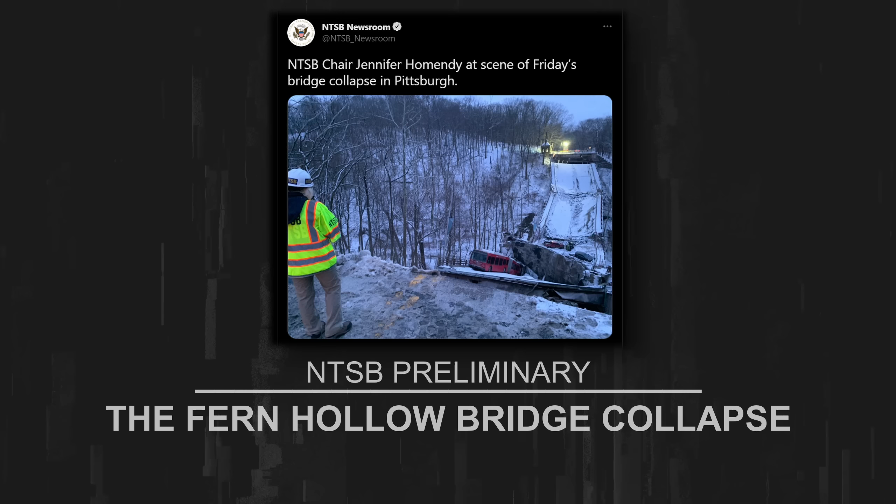As of the making of this video, the NTSB investigation is still ongoing, so anything related to the collapse itself will be sourced largely from their findings via the publicly available report, and thus will include little to no speculation.

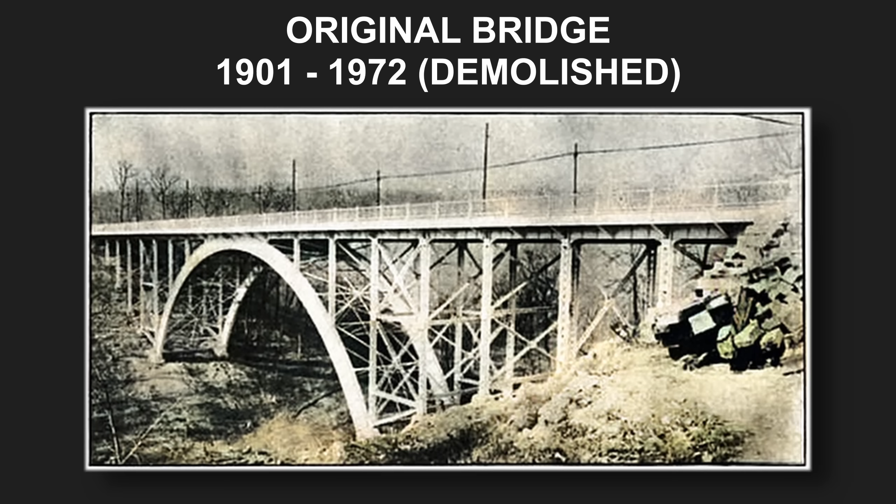In my usual fashion, I've done a bit of my own homework in setting the stage pre-collapse, but the truly deep dive, even into the bridge's history, will have to wait until the full-length episode.

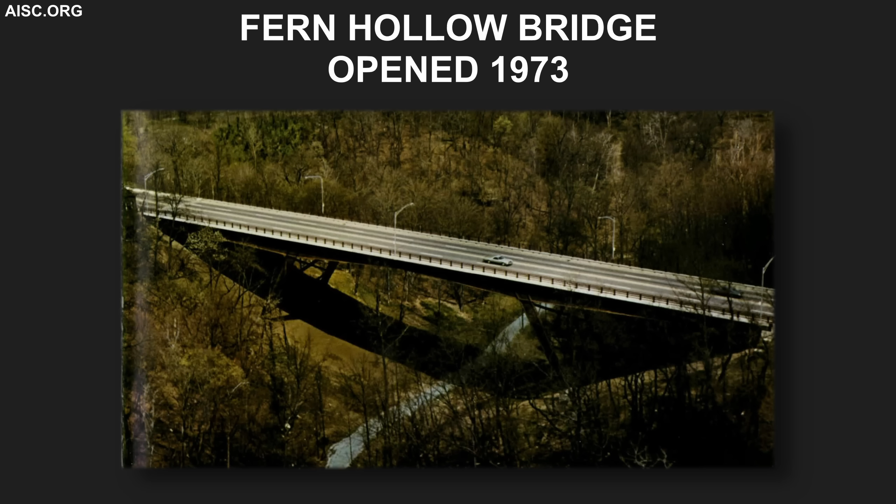Roughly 50 years old and fracture critical, the Fern Hollow Bridge connected Squirrel Hill and Oakland neighborhoods, carrying frequent passenger vehicle and bus traffic, with Port Authority public bus routes passing through dozens of times daily. This was also a popular route to reach downtown Pittsburgh.

At 4 lanes wide with a sidewalk on either side, the bridge passed through Frick Park directly over Tranquil Trail, a forested bike and footpath in the ravine, and nearby to a dog park and children's playground.

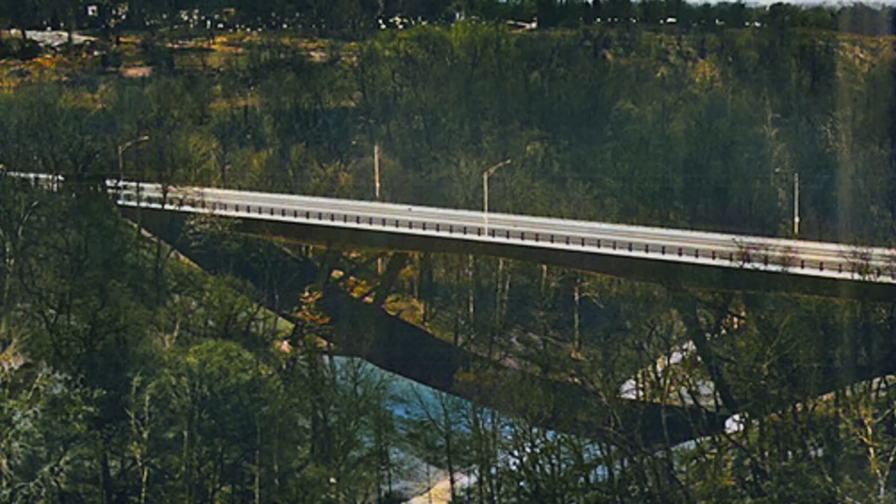Carrying Forbes Avenue traffic across the northeast side of Frick Park at what appeared to be a speed limit of 35 miles per hour, the bridge was 447 feet long, 60 feet wide, and about 100 feet high above the lowest point in the ravine. At 3 spans total, weathering steel forming a continuous K-frame comprised the bridge's structure.

It was relatively short as it only needed to cross about a third the width of the park, the remainder of Forbes Ave within Frick Park at relative street level.

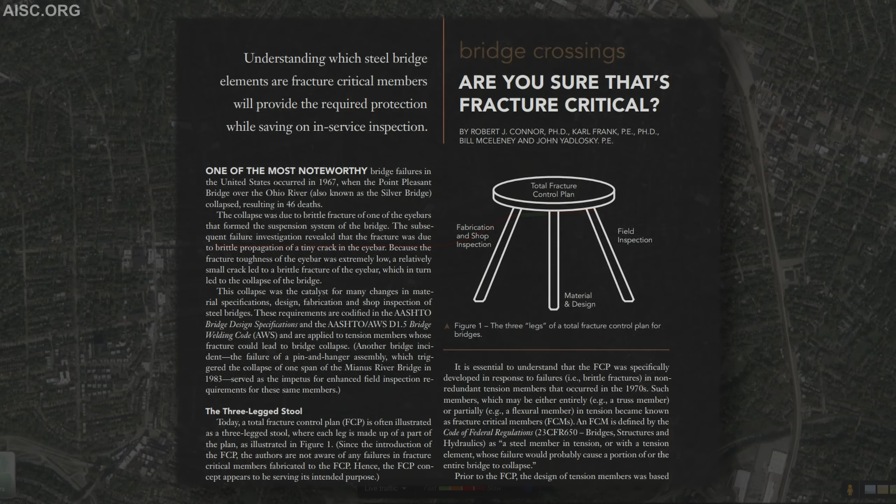Like a 3-legged stool, fracture-critical bridges are those with non-redundancy in members under load, meaning if one member in tension fails, it's likely that a major portion or the entire structure will then completely collapse.

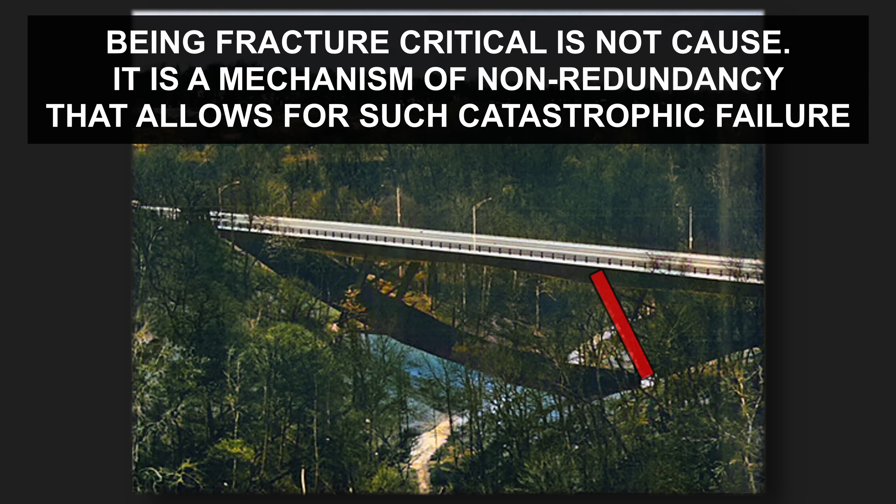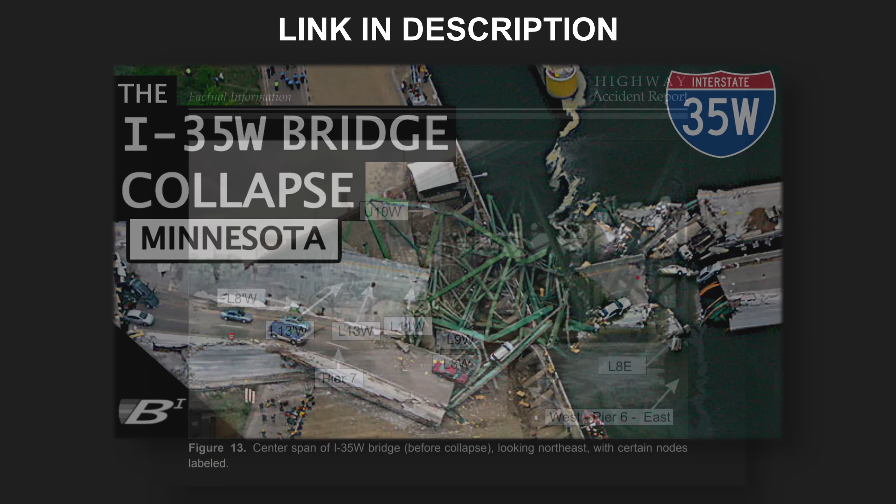The other incredibly unsettling nature of fracture-critical events, like we've seen in the past, say, with the original I-35W bridge in Minneapolis, is just how quickly disintegration will follow once any of those primary members fail. It's instant. Regardless of cause, though, it is this criticality, this vulnerability, especially in older bridges like the Fern Hollow Bridge, that's top of mind amongst many engineers in events like these.

So, aside from the fact that it was fracture critical, what else do we know? Well, speculation is just not my thing, so if that's what you came here for, you'll leave mostly disappointed. The NTSB was on scene by early evening that same day, based on their Twitter feed and reports by the Associated Press.

According to the NTSB, whose preliminary findings also come with the caveat of subject to change and may contain errors, at the time of collapse there was 1 articulated bus of the Port Authority and 4 passenger vehicles occupying the bridge deck. Still relatively dark at this early hour, a 5th passenger vehicle drove off the east bridge abutment soon after collapse once the deck had pulled away, and this vehicle came to rest on its roof.

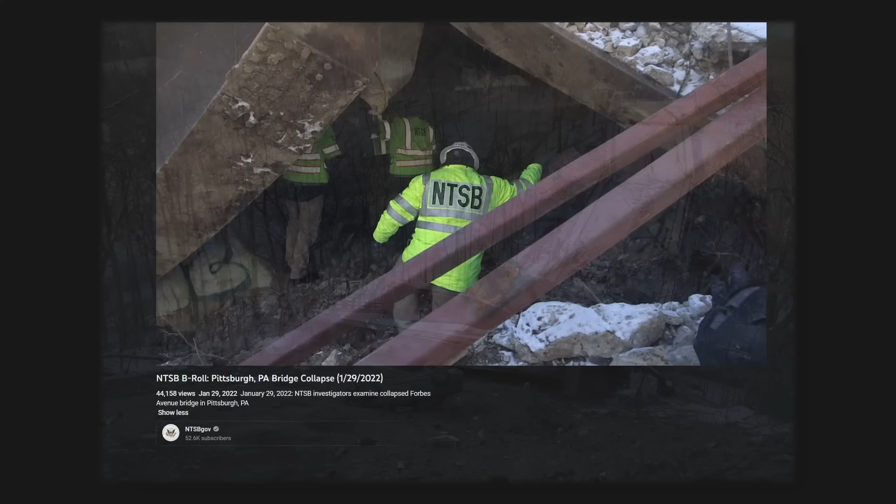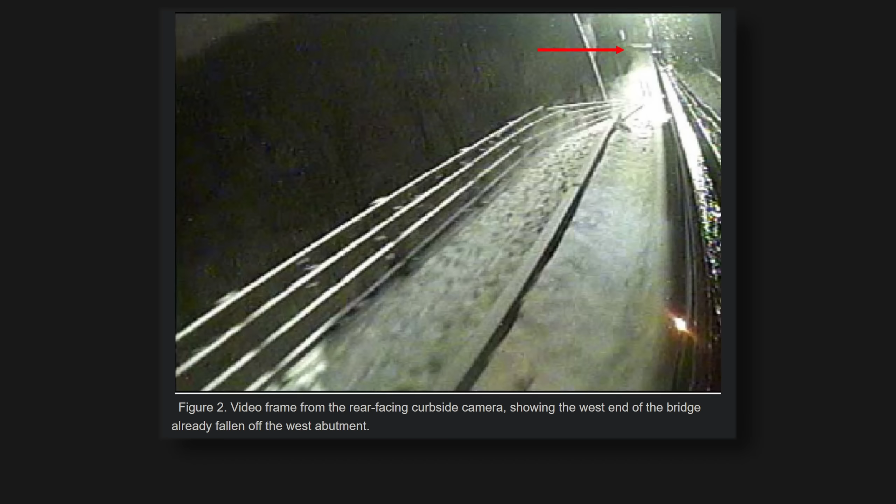Initial investigations pointed crucially to the collapse initiating at the west end of the bridge, followed by the remaining structure. Updated as of May 5, footage obtained by the NTSB from that bus you see pictured caught in the collapse confirmed this suspicion of the west end collapsing initially, as viewed by the transit bus's forward and rear-facing cameras as it drove across.

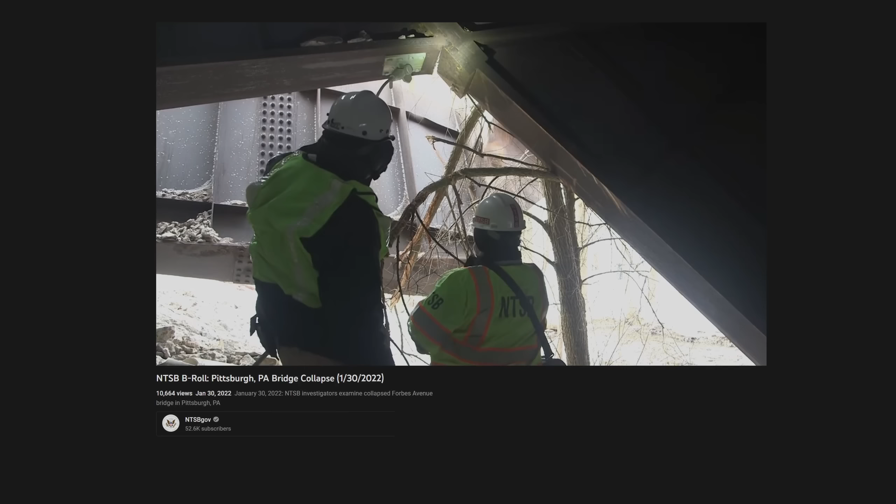Independently verified by the Associated Press, there were rescuers rappelling down into the ravine, and a human chain was also formed by those who rushed to help after the collapse ensued. This allowed the extraction of occupants in those vehicles affected.

Witnesses noted the rumbling sound of the deck crashing down into the ravine below, but then followed immediately by a loud, persistent hissing sound and distinct smell of natural gas. The bridge carried natural gas lines from one side of the ravine to the other, and those ruptured upon collapse. City officials were able to shut the gas supply off within a half hour, according to the AP.

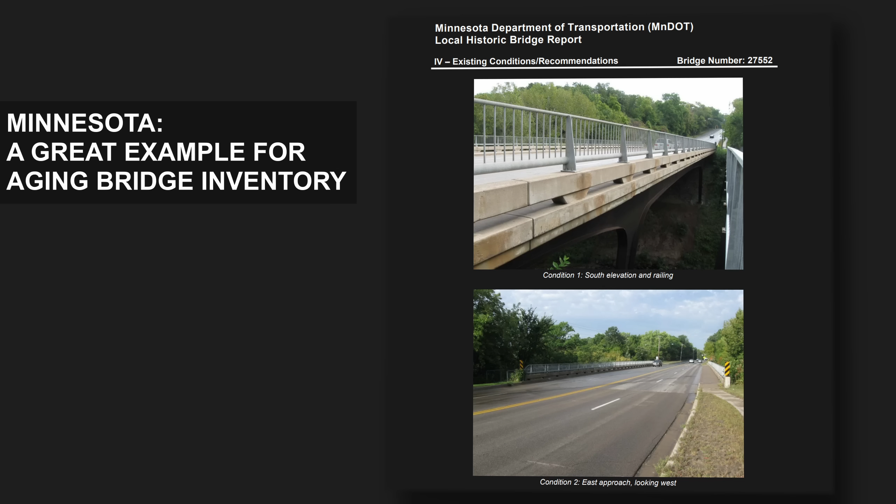As of this writing, the NTSB has not found evidence of glaring deficiencies in K-frame superstructure types in general. In these investigations, it's common for the NTSB to be suspicious of these defects early on, so that other bridges around the U.S. of similar age and/or design don't pose further imminent risk to the public. In this instance, however, they aren't currently issuing any preliminary recommendations at this time.

The bridge received an inspection that I could find as recently as September of 2017, and the Associated Press states one as recent as 2019. Either way, dating all the way back to 2011, it's been described as in poor condition, according to the U.S. Department of Transportation's National Bridge Inventory.

It means little in the way of investigation, but one ironic aspect of this collapse: it took place just hours before the U.S. president visited Pittsburgh to rally support for a much-needed U.S. infrastructure bill. The total funding in this new law is roughly $1 trillion, $1.6 billion of which is earmarked specifically for Pennsylvania bridge maintenance.

With bridges aging like this, along with historically deep-rooted cultural and systemic issues in the world of U.S. infrastructure and engineering, the infrastructure bill is obviously a step in the right direction, but funding is only half the battle. Maybe a topic for a separate video on its own. I don't know, let me know.

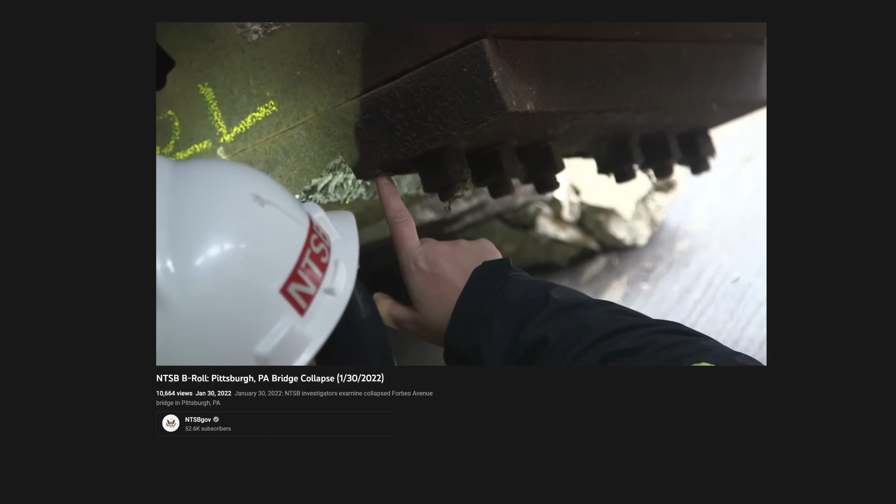The cleanup and removal appear to be complete as of April 2022, and the replacement project is already underway by the Pennsylvania Department of Transportation. Investigators documented both the evidence in place and, as they uncovered, crucial unexposed portions. Critical segments being retained for controlled testing and put under the microscope, so to speak, were hauled away to a Federal Highway Administration research center in McLean, Virginia, while a few others were taken directly to the NTSB's materials lab.

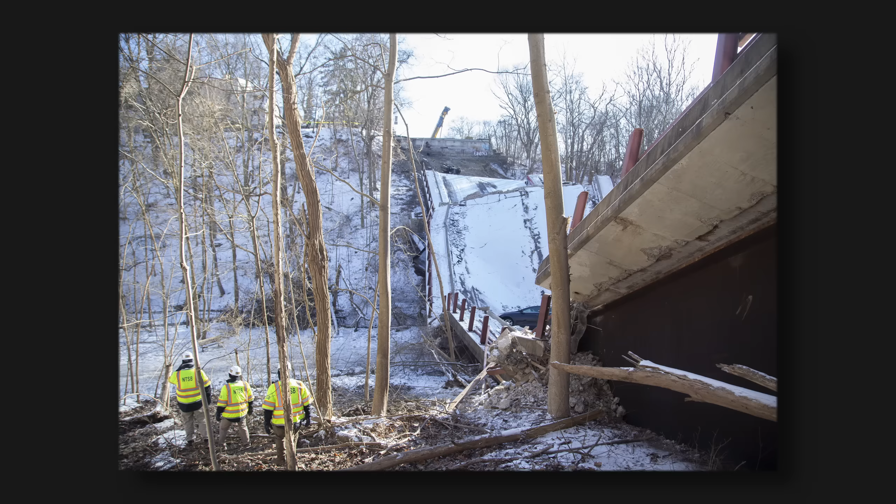The Federal Highway Administration will partner with the NTSB to conduct tests on bridge legs, girders, gusset plates, and weld quality. The Fern Hollow Bridge project, the replacement bridge, currently states an ending date of to be determined, but it's actively underway. A collaborative project between the city of Pittsburgh, the Pennsylvania Department of Transportation, and contracted to Swank Construction and HDR, with a budget of $25.3 million.

These preliminary reports will be the closest thing to current events that I think Brick Immortar will likely ever cover. They are not at the cost of in-depth features though, and once the investigation is concluded, there will likely be a follow-up episode of some sort. If the situation warrants it, a full-length episode in my typical fashion.